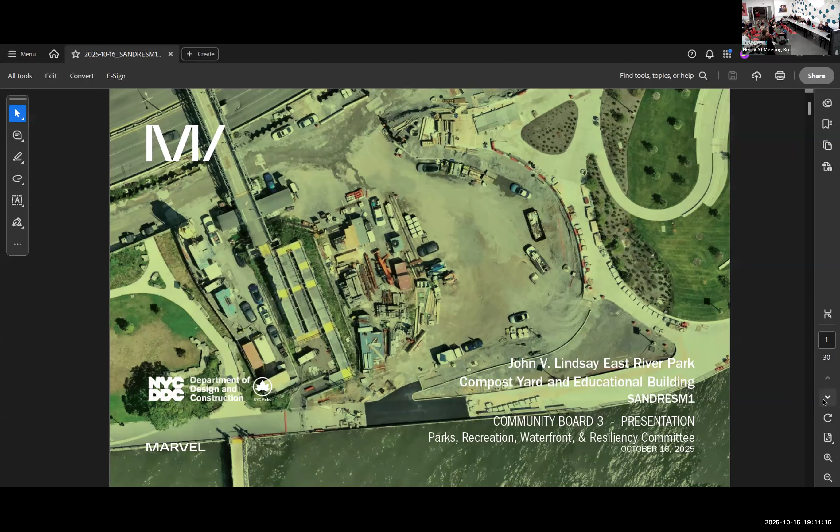The compost, the Lower East Side Ecology Center and Compost Yard is really this last node between Pier 42 and the rest of East River. You can see here the site as it was a while ago, right near the ferry.

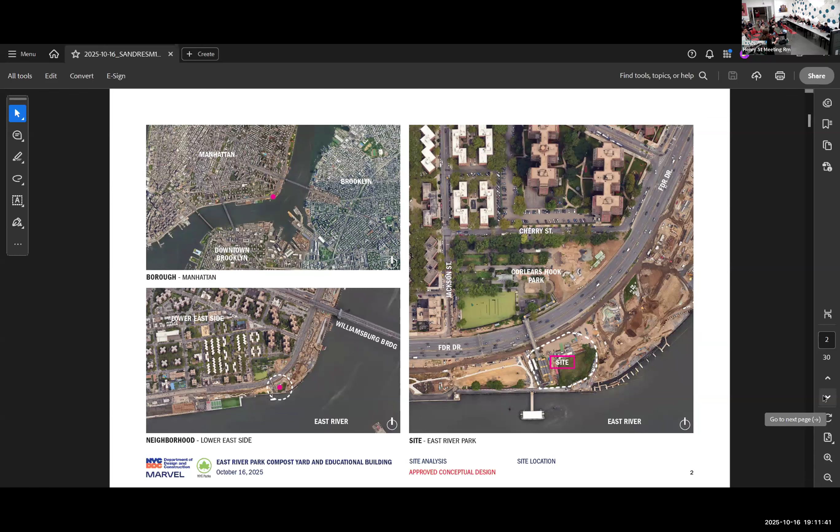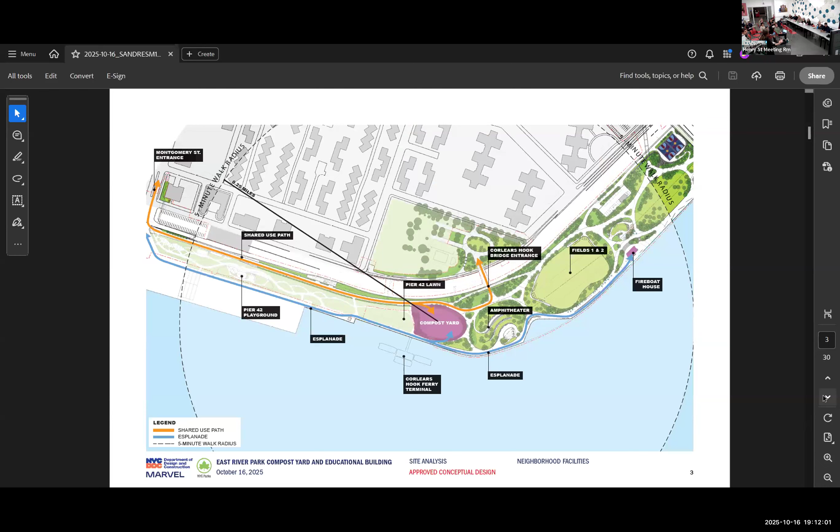Here you can see a lot of the programming that's already started to happen with the Esplanade close by, the shared use path and bridge that goes across the street, the amphitheater, and the fields. That circular dash is a 5-minute walk, so it's really within a 5-minute walk of everything around there.

This is a more recent photo of what's been going on, so you can see there's some green happening, and I know there's more planting coming in the future. Here's another bird's eye view looking towards the river, where you can see the lines of the amphitheater walls curving towards us, which we'll talk more about.

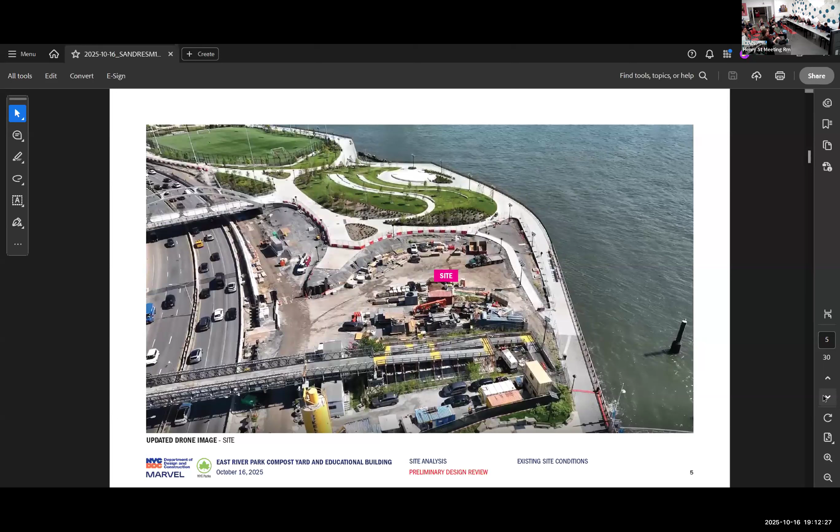As we started working on this, we visited a lot of compost yards. I know Christine knows all about this, but we've all probably done the part where we collect our compost and deliver it. Then it's decontaminated so all the bacteria is taken away, and there's a curing process where the compost is exposed to the air, with aeration happening underneath the slab. Then it goes to a different structure that has a roof, and it's brought to a trommel where it's screened, and then it's ready to be used in a garden condition.

So we thought about that. We also thought about all of these ideals that were very important to us: a strong connection between the community and the park, making sure everyone is welcome, and making sure there's an indoor-outdoor connection with the building, the yard, and the site. There's also a really important educational component with the Lower East Side Ecology Center's programming that we want to make sure is very clear. And we wanted this building and site to be very durable, long lasting, and stand the test of time.

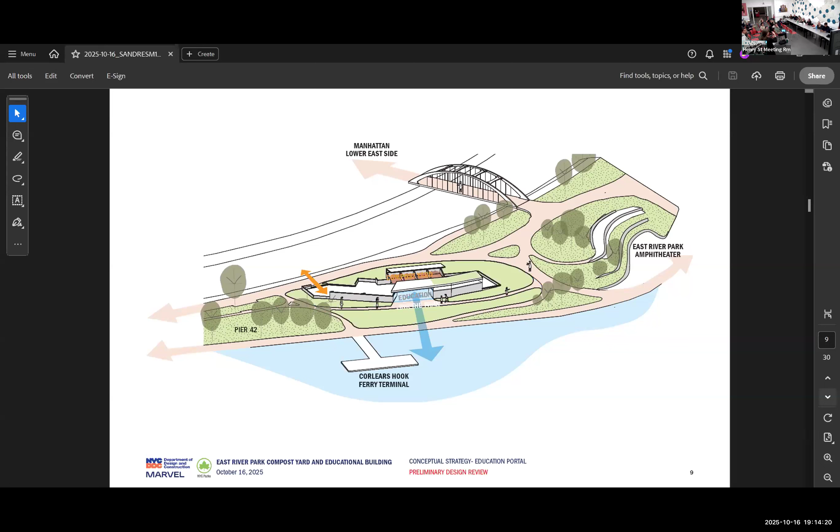Here you can see a diagram of our site. We have this yard, and then we have this educational node kind of in the middle that you're able to access through. We want to link both of the parks, Pier 42 and the amphitheater area, with a new path between them. This is a little drawing of what the structures will look like, where there are some walls and fences around it, and this building that allows you a portal to come in through and also see into what is going on with the compost.

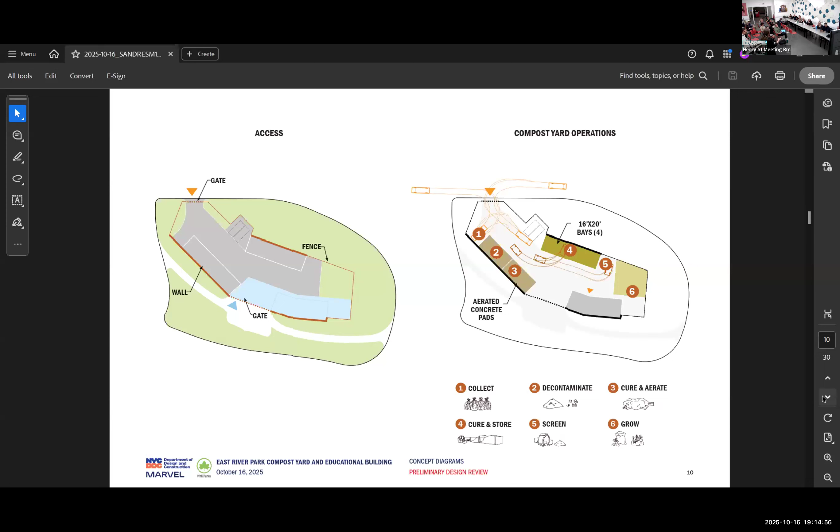Here you can see on the left the idea of access and programming that we have. Where the fences are, all of the gray is where the composting operations happen, and the blue is more where all of the education happens. On the right side, you'll see where we have all the different parts of the composting process, which end in a demonstration garden, which is kind of like the culmination—using the compost in the garden.

With the circulation and education, we wanted to create 2 outdoor classrooms that flank the building, shown in blue, and also have paths that LESEC can bring people on guided tours at appropriate times throughout the site. Then there's a new building where it says public staff, which is really where the offices for Lower East Side Ecology Center will be.

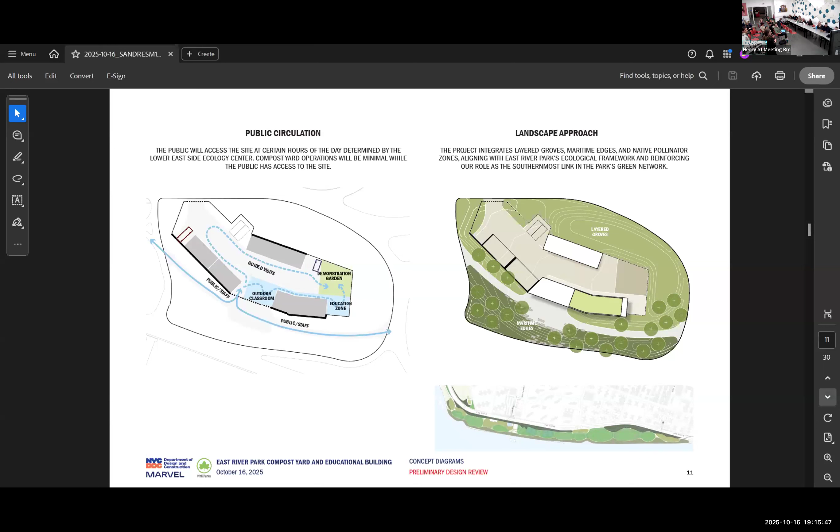The landscape approach is also about being an extension of both parks, creating the same layers of the edges, the groves, and the pollinator areas, so this is a continuation of all the work that's been done so far. The building is also meant to be of the park, so all the materials and thinking behind it really aim to make it feel sited and not foreign. We're considering using a lot of cast-in-place concrete, which you'll see with anti-graffiti coating, so it's easy to clean.

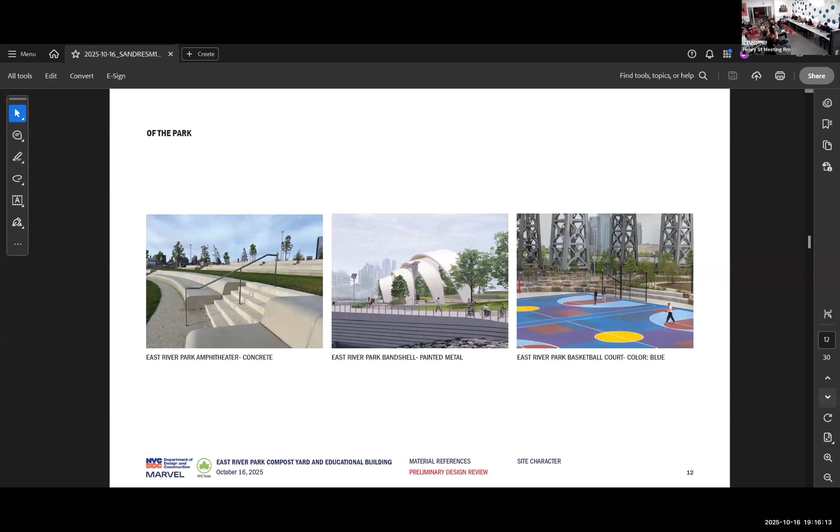There's also a new painted metal band shell on the amphitheater with this thin roof, which we're using on our roof as well. And then we also are thinking about color a little bit. It's part of the building. This drawing is very architect-y, but it's meant to show you how we're thinking of these layers of materials coming into the site.

So the walls wrap and come in and out of datum, and then the fencing sits on the walls. The site structures, the compost structures are all concrete, and they sit on these walls too. And the building is also concrete, and it sits on this wall. We're trying not to use a lot of materials so that it feels all very cohesive. All of the fencing is meant to be the same, with all these gates. And then there's also some grating along the upper windows.

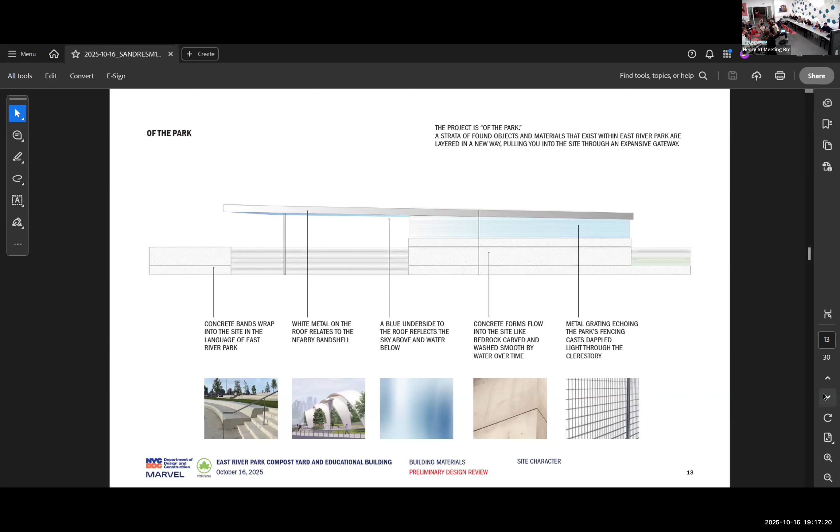In some of the later images, you'll see this kind of thin white metal roof that extends. Underneath it, it's blue, to kind of make you feel like you're at certain times of day—it's a nod to the sky. So maybe it'll be the same color as the sky sometimes.

So I'll pass it off to you, Dale, to talk more about the landscape.

Yeah, so this is a good point of extension of the building and the materiality of this project, right? It's taking cues from the existing parks, both in the building and in the landscape. If you can go to the next page, we can show you a little better that sort of integration and how people can access all the way around. You see, Debbie mentioned the idea of connecting the Pier 42 park side and the circulation there with the Lower East Side Ecology Center, and then the rest of the East Side Coastal Resiliency Park. So we have this circulation that happens in the middle.

Taking advantage of that outdoor classroom, which you see here in white, that is a roofed open space, right? That's also the entrance—the entrance for staff and the entrance for public. And then right outside of that, you have this sort of gathering space in front of it, which again takes cues from the materials and articulation that the rest of the park has, with a series of boulder edges and picnic tables and umbrellas to provide shade and space for people to gather there.

On top of the office space, you also see there's a green roof in that area, and we're also providing a lot of trees that are an extension of the typology of trees happening in the rest of the park, and we want to make sure we provide for shade in the future. So we're doing both the umbrellas and the canopy trees, so that in time you'll also develop a good canopy and shade area there.

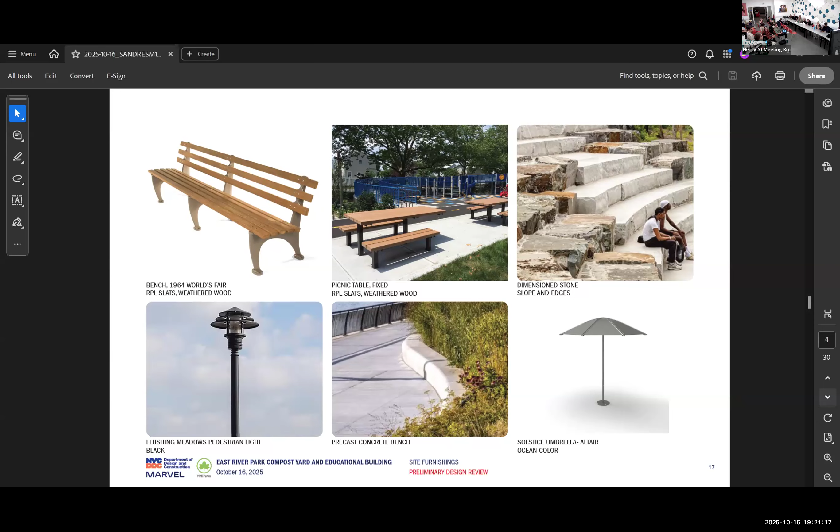A lot of this vegetation includes plants that you see in other parts of the park already. There's a lower point with vegetation more related to areas that may be a bit more wet, and there's also an upland meadow palette.

We're creating these berms around the outside of the building, very in line with how the topography is being manipulated in the rest of the park, but also to help screen some of the activity happening inside the yard from the park activity. So you get glimpses of it in some areas, but you're also screening the activity with these berms.

And then some more evergreen, denser plants immediately around the fences, which will also help screen the fences and reduce the visibility of seeing the fence.

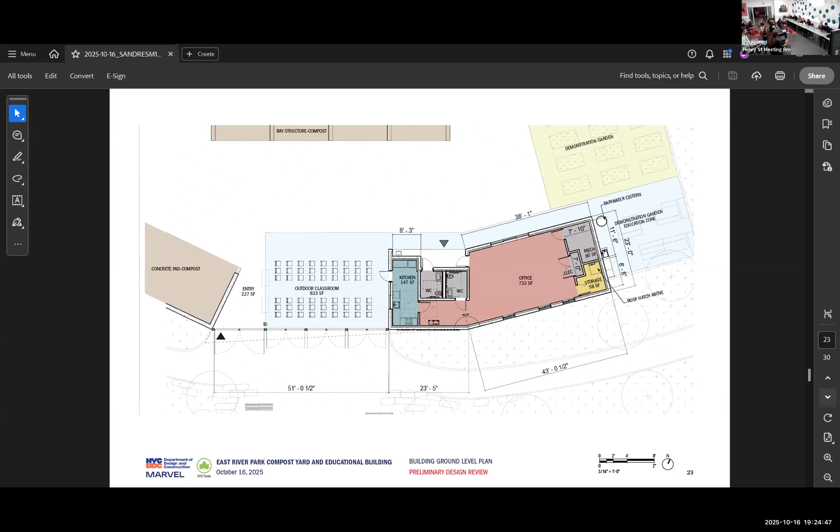But it gives an idea of where you'll see the composting structure—these are the bays where they're carrying material. This one is the one that has to have a roof, that's the compost bed. And then there are spots for different things, like the white and green areas.

Okay, hang on, let her finish and then we'll ask the questions. And this is the building we were talking about too. What? No, just—no, go ahead. I'll just ask you to start once you get in, when we finish.

And this is a view from the Esplanade, so you can see the same roof structure with the green roof, and there are some windows in there.

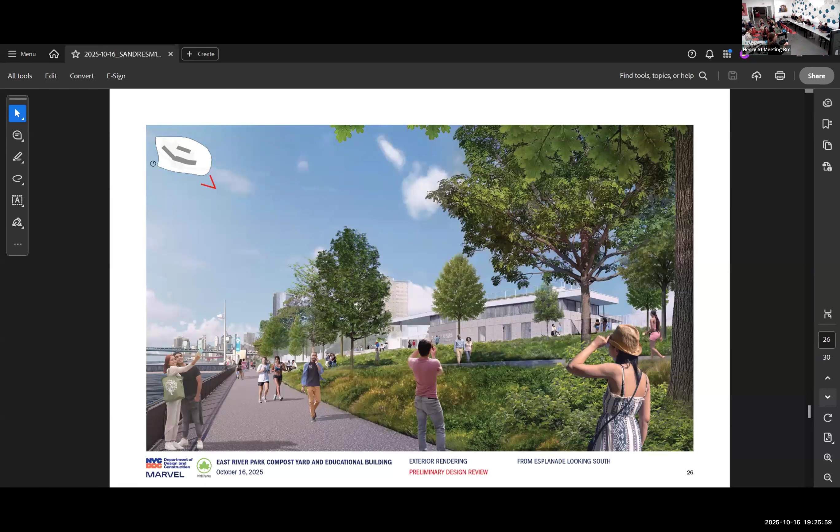Next slide—here you can see the idea of the fencing materials being the same, with the roof gratings and the white of the roof that we're talking about with the amphitheater.

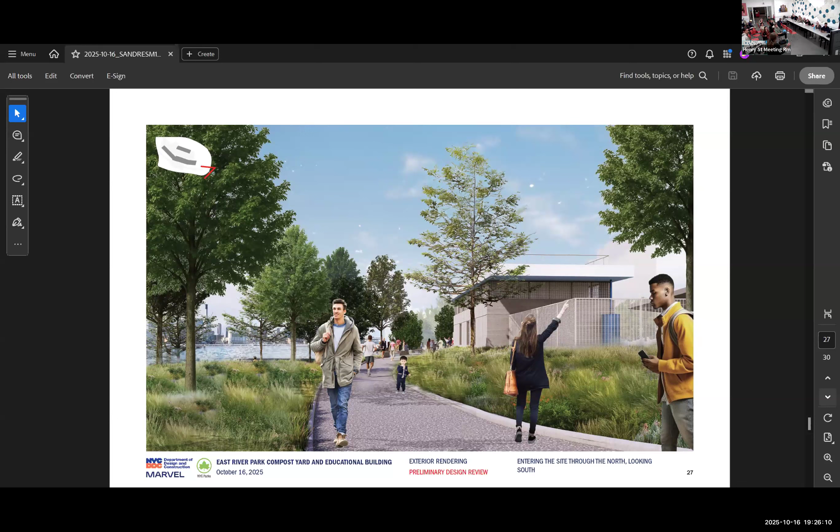This is that same view Dale was talking about, where we're in the gathering space in the front, looking into the yard and into where you see the compost bays. And this is the view from inside, like if there's a volunteer day, there would be people around and you can have a classroom program in there.

And this is a view being in the classroom, looking out towards the river. With all the gates open, it can really feel like you are inside and outside, and that shade is important too. This provides shade in a very permanent way and allows this connection we hope with the community. That's it.

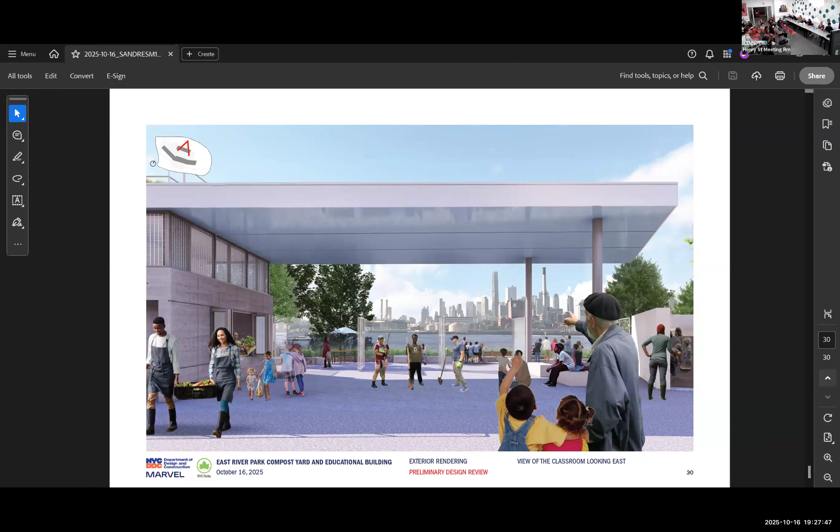I think it's beautiful and I would like to work there, but I have a couple questions. Big question: where is the wall in relation to all this? Because looking at the water views you showed, there is elevation at this site. And what's the timeline for when you put that elevation in, which is not currently there because this part was left out of the original build out? Do you have to put in all that fill and then wait to build the building?

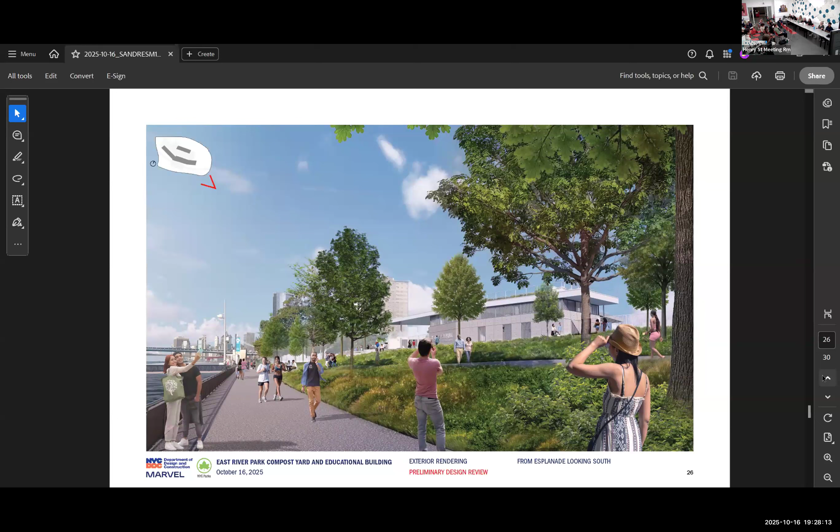I'm just going to go through all my questions. Will the city council money that's been allocated cover this, or is it also part of the overall plan? Then smaller questions: I didn't get a sense of the size of the space, like for bringing trucks into the middle part, and the fence for the outdoor classroom and the entryway from the water side where people would be entering. I'm skeptical of the security of that. I think it looks really nice, but when nobody is around and it's closed, I'm a little skeptical.

Hi, sorry, I'm Melissa Haldeman with NYC Parks. I'll just join so we're all on the same spot. I think I can answer your question about the wall. So it's right around where the compost yard is, where the wall becomes buried. It's above grade and running along the shared use path all along Pier 42, and then it goes below grade right there. So the site actually starts at elevation 8 and goes up to elevation 18, about 18.5, but the building is 16.5, and the pathway is around 18.

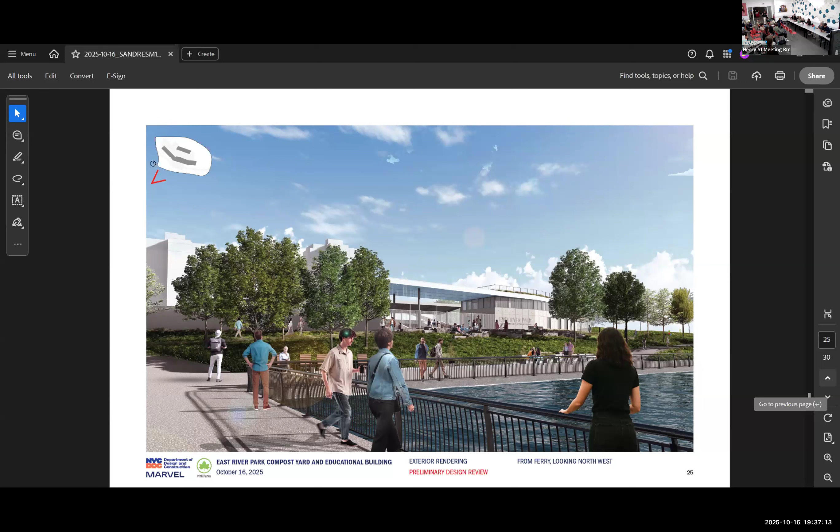I also want to say that the operational side is oftentimes just termed as composting, but we do more in East River Park than composting. We also do a lot of maintenance there. We were the stewards of the park before it disappeared, and we are the stewards of the park still. So there's a lot of weeding that we're currently doing, and we're getting data on how many weeds there are to understand what's coming at us in terms of composting all of that.

Stewardship also requires that you have wood chips at hand. So one of these covered bays, for example, will just be to store wood chips. So when we do weeding, we have wood chips at hand that we can bring out and cover the ground that we've now cleared of weeds.

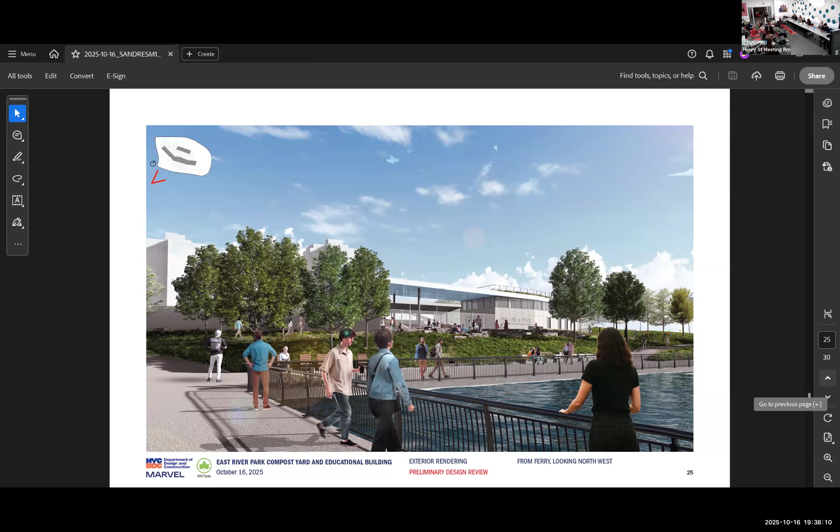So you should see this site more as— we need to come up with a new name, and hopefully everybody will help us, because it's the compost yard, but I think it's compost yard 2.0, and we need to find another name for it.

Thank you. Okay, Val, can you go to a picture where you show, like, the amphitheater? Okay, so where exactly is the ecology center? So all of this is the whole site. Oh, okay, so that's the site that right now has all those trucks and whatnot in there, all the random trucks. Oh, okay, so this is not done yet.

No, we're here because we are engaged with PDC, and it's important for all of you to give comments. So we're getting ready to submit this to the PDC for preliminary review, and then there's a final presentation later. Okay, so you're getting ready to submit this? This hasn't been submitted yet? We were approved for conceptual design with PDC, and then we're planning to submit this for the next round. So right below this is Pier 42 Park?

Yeah, this is correct. Everybody likes the design so far, going across to where the amphitheater is—people like that. The section over there, Pier 42, people all talk about liking that, so I was just like, where are we talking about? It's like that pile of dirt with trucks. No, I get it, I'm looking at the picture.

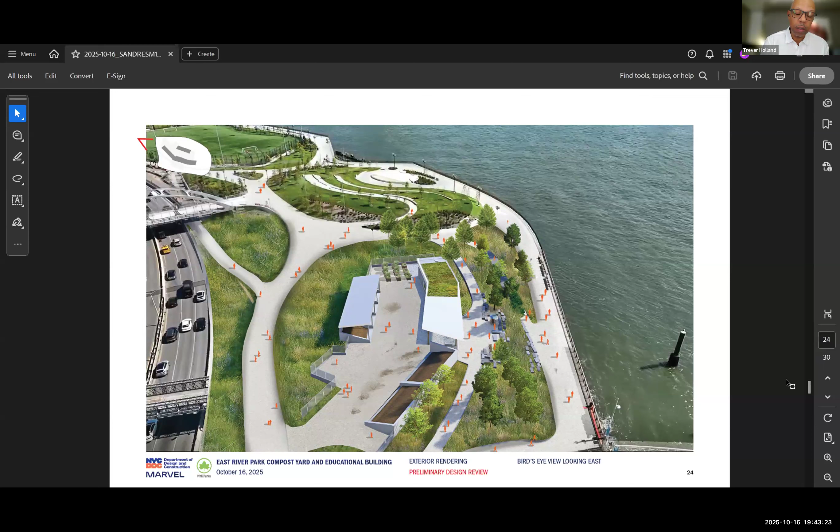I think that's something we have to go back and look at with Parks and DDC. I don't know if you heard me, but I think there's an opportunity, considering the roof space and size, to add solar to take care of the power for that building, especially considering this is the ecology center, and solar power has become a lot more efficient.

So I can take that back to Parks. My initial response is that the designers had to pull back the size of the green roofs a little bit, because the roof that extends over the outdoor classroom gets thinner and won't support as much. So I'm not going to put you guys on the spot to answer that now, and also solar panels were not part of the scope of the project. But Parks will certainly take that back and look at it.

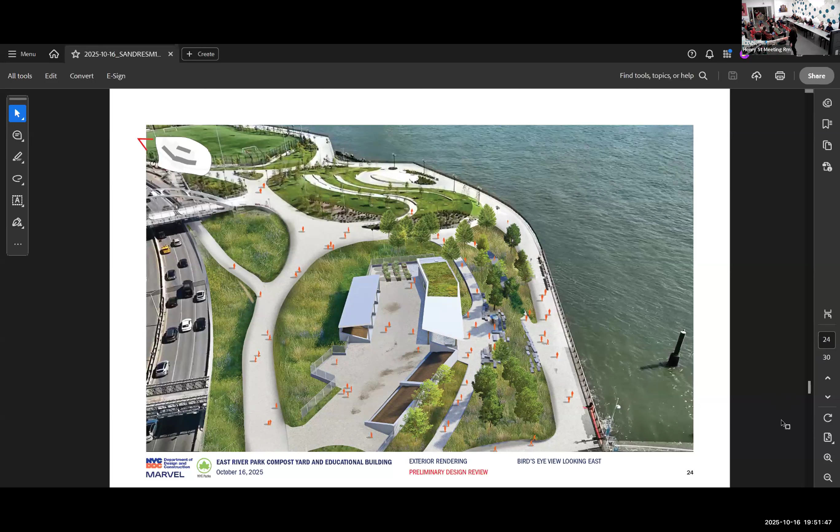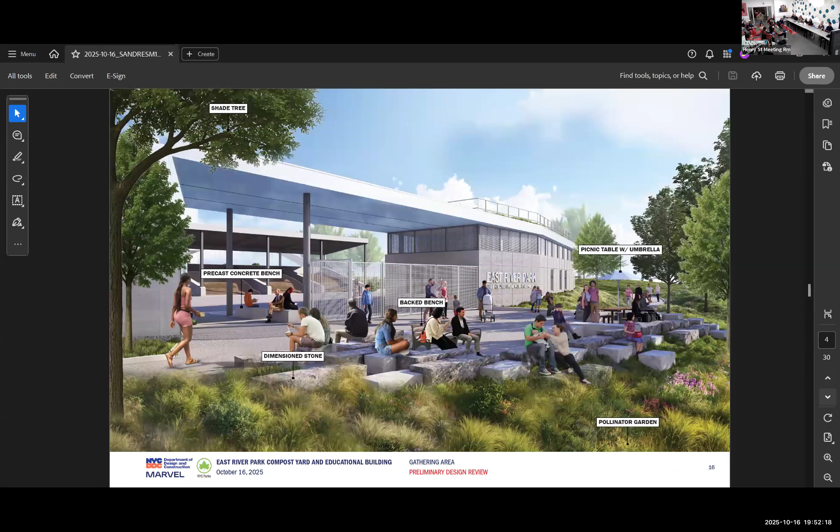My comment was the same as everybody's, it's just so hot and so exposed, there's no sort of passive solar. Are there going to be trees behind the building, or on that side? Why aren't there trees making shade for a passive solar situation? Maybe there's a way the trucks could turn around in a circle instead of backing out, with trees in the middle and circulation around it. I think there are better ways to do the layout so it doesn't have to be endless concrete - permeable pavers, gravel, something passive solar. You could have vines on the building, it could be so much greener. It's very exposed and hot.

We're maximizing the amount of area where we can actually put trees within this, and that's something we've been increasing. The areas you see without trees - we also have to be mindful there are some zones where the wall is, the front wall, or where utilities are that we cannot plant. So we're keeping track of that, but we're maximizing, we're going to maximize it.

Behind the building, can you build the soil up? It will be planted, for sure. So there's an area here where we cannot plant trees, but you can plant other things, right? Well, can you berm up against the building and have much deeper soil and then have some trees? There are ways to get it in there, even large planters with no bottoms.

I've been trying to think about how to recycle boats - I'm working on a marina, recycling fiberglass hulls. There happen to be a lot of boat hulls that would make great giant planters for trees, and I'd love to talk to you about that. I think there has to be a little more creativity, instead of looking at the restrictions, looking at more opportunities for greening the buildings.

Maybe there's a way to get the trucks to turn around with a loop, instead of little umbrellas in the middle of hot concrete reflecting back in your face. It's going to be great.

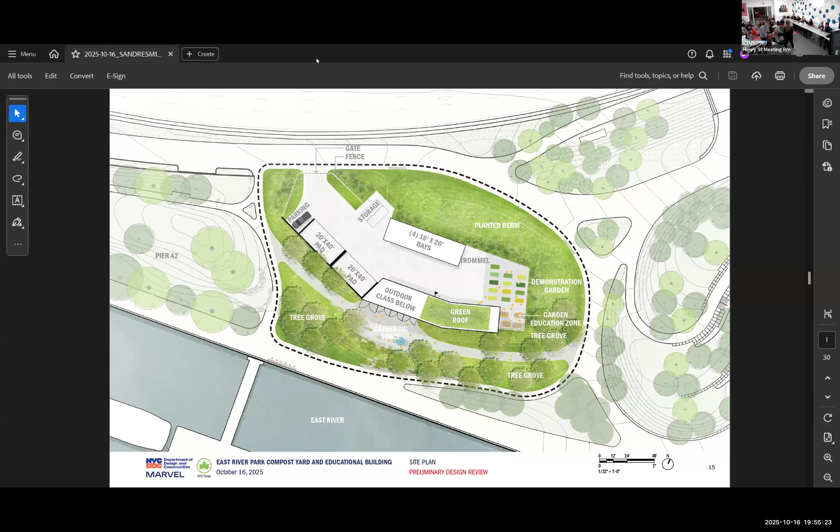I would just ask quickly, when do you expect to be coming back to this committee? Do you have a good sense of that yet? Might be wrong. I think there's - I'll defer to Melissa. Yeah, we'll figure that out. All right, so our next - thank you.

Our next agenda item is - actually, can I ask you a question? Would the committee normally give a resolution now, or would it be done with the full board meeting that month? What, if there was to be a resolution? We were told there wasn't a resolution, but we need a little bit of clarification. Would it be more appropriate to do it now or with the full CB3 later? Never, always at committee. Okay. Resolution for what?

Does that normally come before we go to PDC? For the final design, yes, but what you asked me for earlier was just a letter of acknowledgement that you presented. The board doesn't have to vote on a letter of acknowledgement you present. I think it was DDC that put it through, so we won't generally have to vote on that. What you have is, like I said, email me a letter, and we'll sign that you came and presented.

Okay, so Ethan, you have the next presentation. I do, yes. All right, so next presentation is on the East River Greenway project to replace or bypass the pinch point at Con Ed. This is another thing we've been waiting very eagerly to hear, so thank you. Go ahead and share it with us.

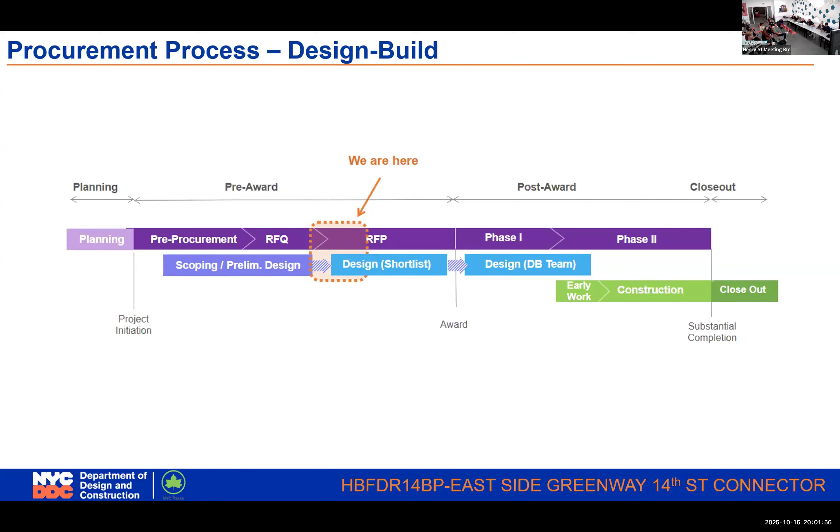So moving to the next page, just to give a snapshot of where we are. We're no longer proceeding with the flyover bridge. We're moving forward with what we're calling the East Side Greenway 14th Street Connector. It will be an in-water structure that ties in on the north side at Captain Patrick J. Brown Walk, down to the south side at East River Park, the northern part of East River Park.

We released the RFQ for this brand new in-water structure project in March 2025, out to industry. The evaluators selected 3 shortlisted proposers, with whom we're currently in a confidential period. We announced them in July and released our RFP to those 3 shortlisted proposers in September. We're moving forward with the process, anticipating a notice to proceed with our selected design builder in quarter 3 of 2026, allowing us to make that selection and go through the whole registration process of their contract.

With that consolidated schedule, by selecting the design build firm, we're anticipating the start of construction in quarter 1 of 2028, and construction completion in quarter 3 of 2030. The project budget currently allocated is approximately $160 million.

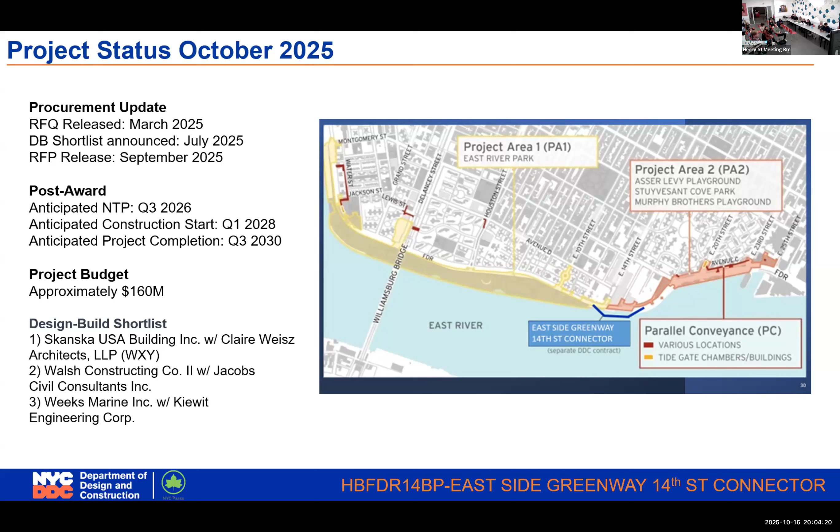Next slide, please. So I mentioned it's an in-water structure. I want to reiterate that the flyover bridge concept would not work due to the Con Edison pier on 14th Street, which creates a very narrow profile, that 4-foot wide pinch point we're trying to alleviate. So what we're planning to do is provide an in-water structure that goes around the Con Edison pier, allowing for a much wider pathway for both pedestrians and bicycles, which we're excited about, since we want to open it to the community and prevent everyone from hitting each other in that pinch point.

I forgot to mention this is a DDC project working in collaboration with Parks, actually Melissa. I bring that up because with design build, it requires a very collaborative environment, and one of the reasons this project was selected for design build. We're working with Parks to develop all these requirements and ensure the project is great for the community, working with DOT to meet their requirements, meeting with the Coast Guard and Army Corps of Engineers since this is out in the water, along with DEC, the Department of Environmental Conservation, and working with DEP on all of our stormwater items.

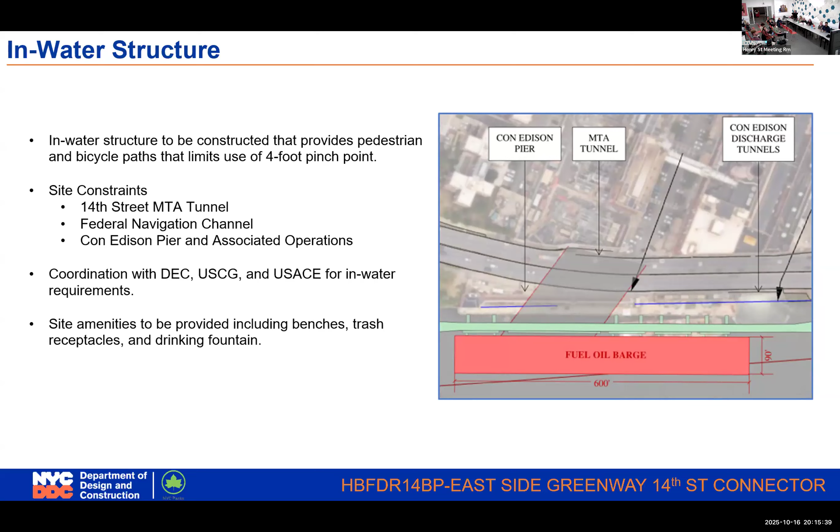Okay, the previous slide, so I can do a quick thing. Sure, do you want the southern part or the northern part? Well, that thing with the green bar in the water. The previous slide, yeah, this one? Say, Ethan, could you send this spec and the previous one to the office? Yeah, it'll also be posted online on the DDC website.

So I have a question before we take any questions from the public. This design build process -- we just had a presentation about something being designed through the traditional process, and we'll go to the PDC and all of that. What happens to the design of this? Is there a point where it's fixed? Does it go to the PDC? Is it reviewed, and all of that?

Absolutely, the process doesn't change. We still have to go through all the different regulatory approvals, including Public Design Commission. All of that would work. The conceptual PDC presentation and the preliminary PDC presentation, including the community board, would happen in phase one before we even do any construction. We want to make sure we're doing it right, before we start something and then have to remediate. So to answer your question, yes, the process stays the same. We'll still have the opportunity for the community to look at the design and comment.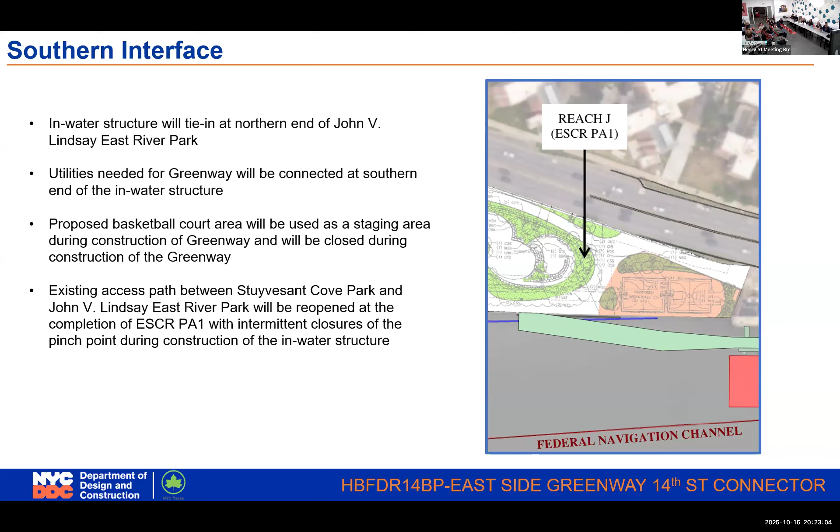No, I'm talking about if it's possible to make it bigger than where it connects to Captain Patrick J. Brown Walk. Well, I understand what you're saying, but can you make it wider, expand it? Our in-water structure is going to be 32 feet wide in this specific area, and on the northern side in between it's gonna be 25 feet. But again, where we terminate at Captain Patrick J. Brown Walk is where we're targeting that 10-foot width.

Mainly because that's an existing condition and we can't expand on that, we don't have the funding for it. So it'll be 10 feet wide, split like 5 feet for pedestrians, 5 feet for cyclists. For Captain Patrick J. Brown Walk, since we're not doing any work on that, we're not separating the pedestrians and cyclists.

We're focused more on the in-water structure where we'll have that separated. So if I'm understanding this correctly, Fanny, I think what he's saying is that the entrance that comes off Stuy Cove will only be 10 feet wide. But the greenway itself will be 25 to 30 feet, depending on what part of it you're in. So the entryway will be narrow because of that, but the greenway itself will be larger.

But exactly how wide is the surface, is it 25 feet? For our in-water structure, it would be 32 feet wide in this area where you have the green, and then right by the Thomas Pier it would be 25 feet wide, split between both cyclists and pedestrians. Okay, so I got confused, sorry. Yeah, sorry, the 10 feet wide is Captain Patrick J. Brown Walk. Okay, I see, I thought 10 feet was the actual roadway, but it's 25 feet, okay.

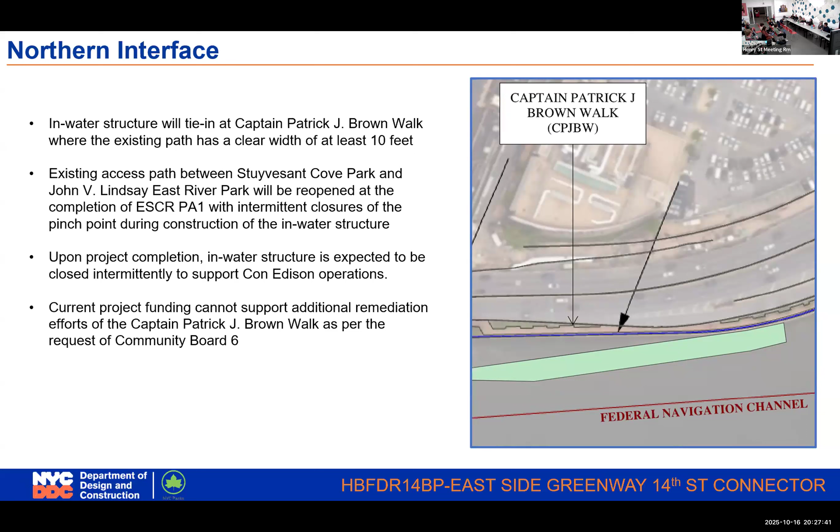Okay, thank you. I think you've gotten some good feedback about concerns about traffic conflicts and safety there, about shade and usability of the space, what the surface is going to be like. So if you can start to think through some of those things, and next time you come back we can talk about those more, that would be great. Thank you.

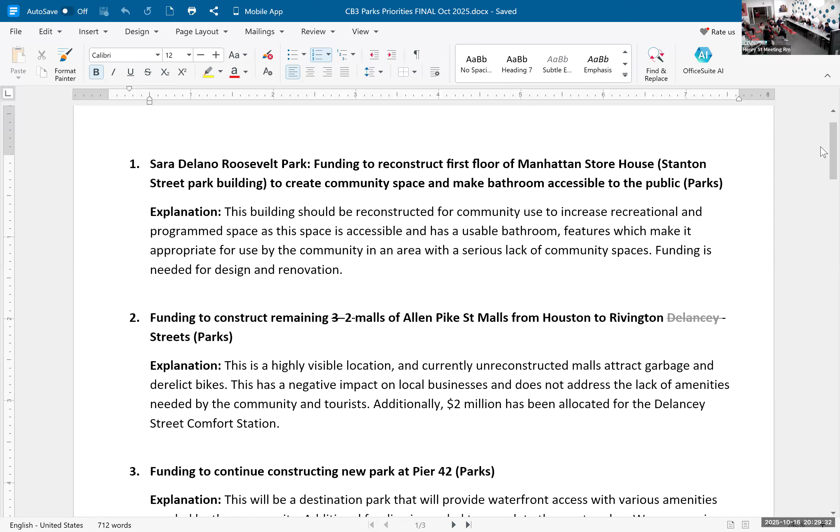What I did to prepare for you is I took all of last year's priorities that have not been funded. Trevor and I met previously with parks and went through a chart they prepared to let us know everything that's funded. So we took what's left from last year that's not funded, and included priorities the community board funded that weren't necessarily parks priorities, like the Stanton Street Park House.

So what we're looking at now is that list, edited to show what we still have, in the priorities you voted on last year. You can change the ranking if you want, but this is what you voted on in the past. I suggest we just go through each one, do you want to do that?

Okay, the first one has been a priority for this committee for a very long time: to reconstruct the first floor of the Manhattan Storehouse to be used by the community. Right now it's being used as storage for, I believe, all of Manhattan, and we want it to be a resource for Community Board 3. Parks is looking at this, but they haven't decided on exactly how it should be used, whether they go with our suggestion of a nonprofit running programs. But it's definitely on the list, so it's our highest priority.

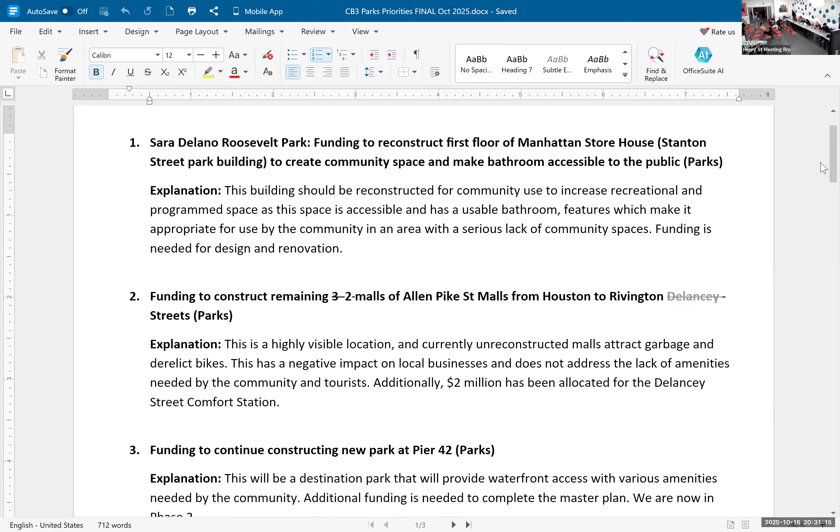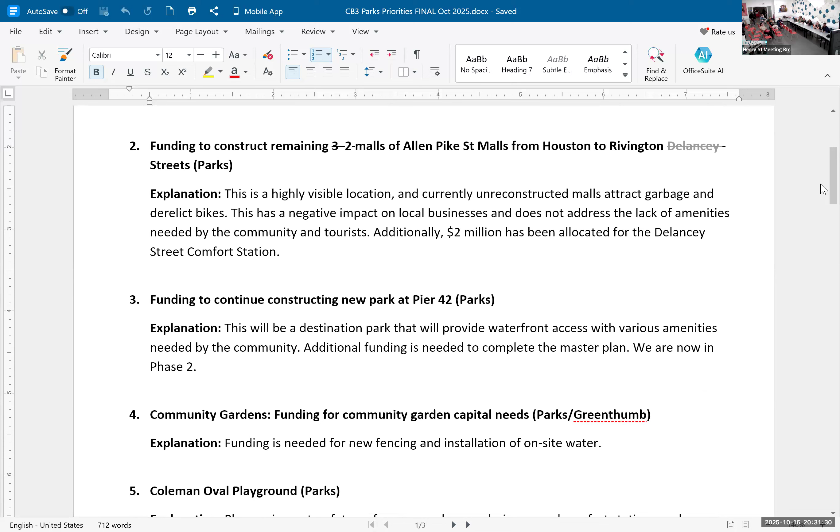Number 2 is the Allen Pike Street malls. They've been funded one and two at a time. We still have two that are completely unfunded. Some of the others still need construction done, but they're funded. So we have two malls that still need to be funded.

Pier 42, which we've had on for a very long time. We voted years ago to do that in phases, and we are now in phase 2. So it is used by the community, but we have further design and plans that we voted on that we want to keep on the agenda.

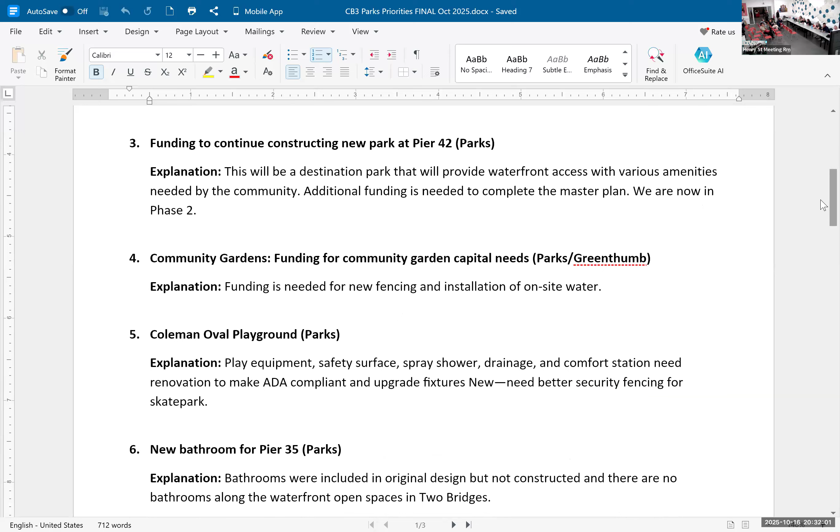The next one is community garden capital needs. So these are all capital needs, by the way. We did not get anything from the gardens, but this was on from last year.

Coleman Oval Playground - they still need play equipment. There's an explanation there of exactly how the money would be spent.

Next one is the bathroom for Pier 35. We've been told that technically it can't be done, because of the drainage and sewers and everything. But there's still something that needs to be done, even if it's porta potties or something, so we kept it on the list.

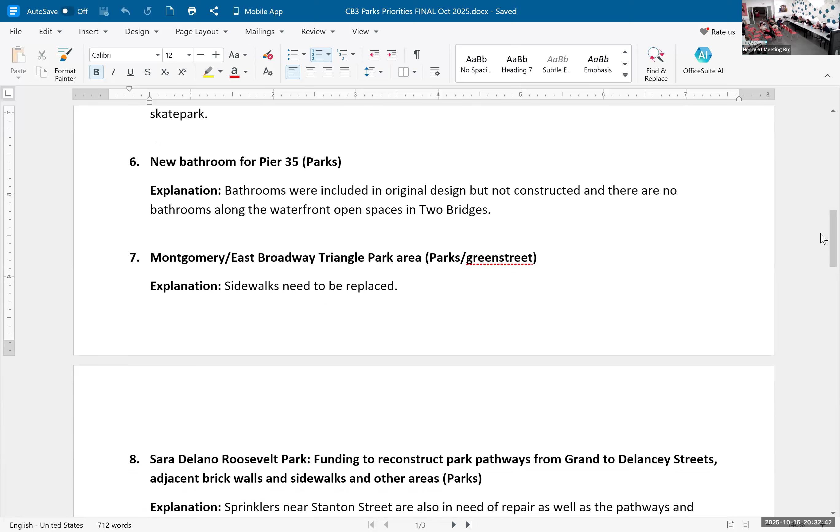The next one that's not funded is the Montgomery East Broadway Triangle Park area, and that one is sidewalks - Parks is responsible for sidewalks outside the park, so we're asking for the sidewalks to be replaced.

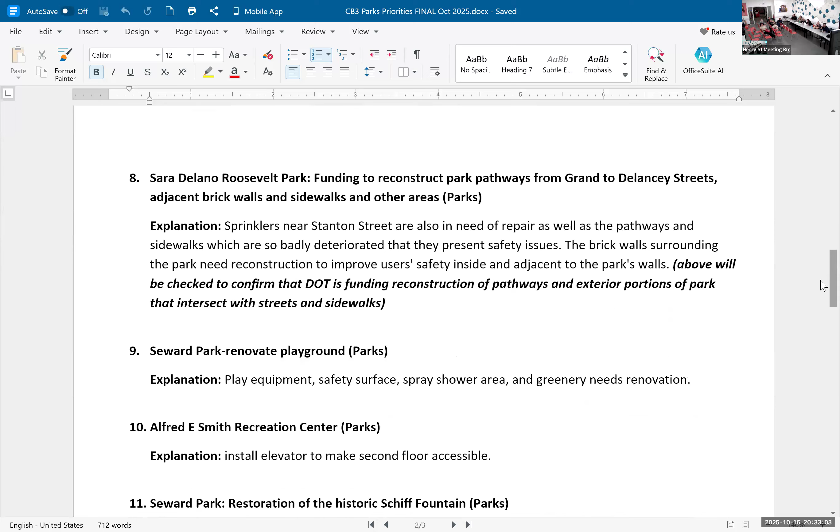Sara Delano Roosevelt Park - we still need funding for the reconstructed park pathways from Grand Street to Delancey Street, the brick walls, the sidewalks, and some other areas. You should jump in and put in any comments.

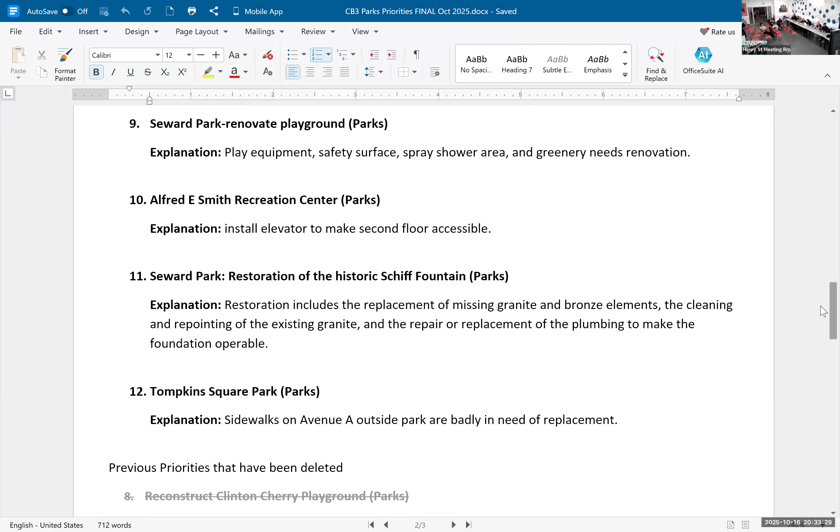Seward Park - the playgrounds need to be renovated, they're heavily used. Alfred E. Smith Recreation Center - there has been some reconstruction, but now they need an elevator to make the second floor accessible. Seward Park Historic Schiff Fountain needs reconstruction.

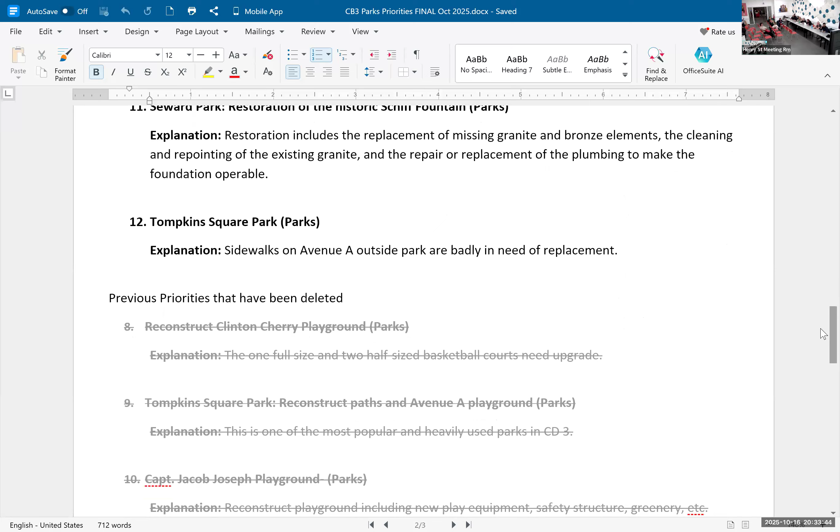The next one I'm actually going to ask Lynn because he was investigating this - on Tompkins Square Park, we had asked for the sidewalks outside the park to be replaced. Did you decide it could be patched instead, or what? I think some of them can be patched, and there's this wider issue, which is a lot of empty tree pits.

I think it should either have a tree or it should be paved over, saying that it's going to be for the flowers. Can I chime in? Of course.

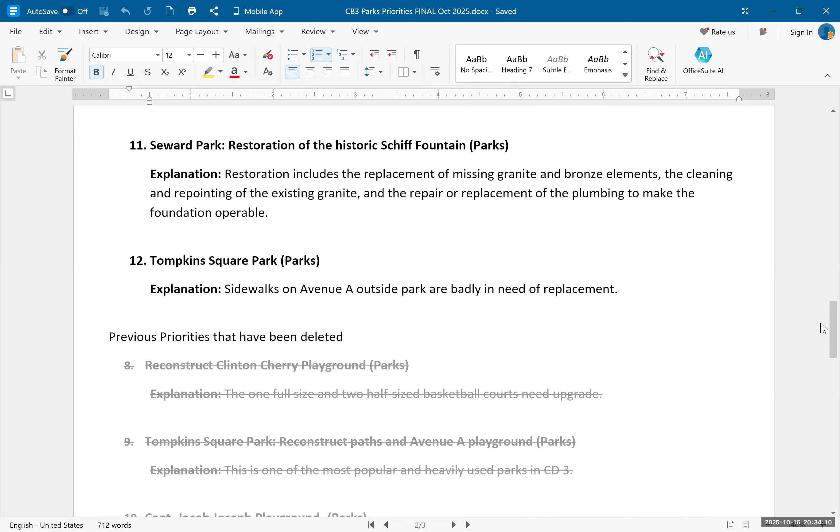So there's an issue with the DEP lines, they're sinking and a lot of the drainage is very poor. That's why the trees are dying. There's a need for better drainage on that whole side of the park and another sustainable water source on that side of the park.

We recently lost access to water when we had an issue in one of the playgrounds. We realized most of the water lines are connected to the building, which has brand new pumps, but all the water lines are a lot older. So the whole park went down and we only had the Avenue B side for a while. The dog run went down, the playground, and all of the water connections for Lower East Side Ecology's gardens near Avenue A. So what we're talking about is Avenue A.

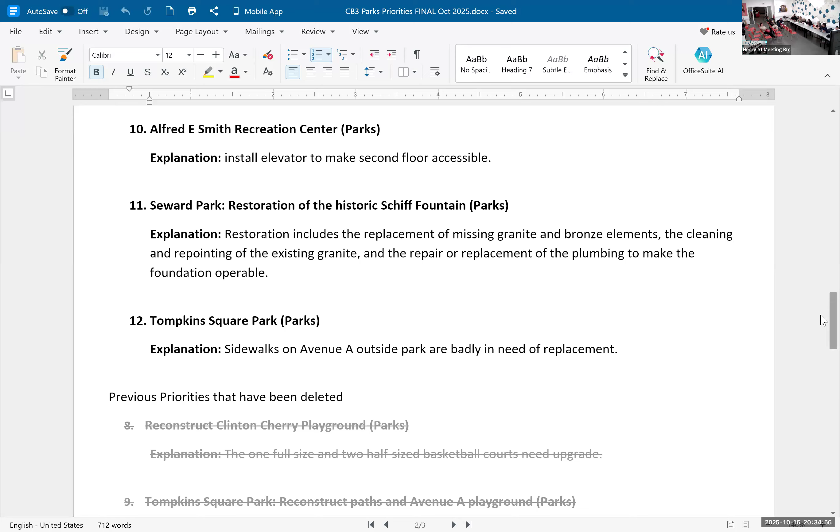And the empty tree pits, we do not want trees on. This board has done a resolution saying it's in the middle of the farmer's market. It's very unsafe, we've seen pictures. We want the empty tree pits between 7th and St. Mark's filled in. If you want to put bioswales, which has been discussed between St. Mark's and 10th, that is fine, but that's what we're talking about right now. We've done walkthroughs through there.

So what I'm asking is a funding issue. For the sidewalk, first of all, we're talking about the sidewalk. It sounds to me like we should keep it on the list and say it either has to be repaired or reconstructed. Does that sound right? I think it's about the sidewalk that's caving into the street because of those DEP lines underneath. So it's kind of infrastructure and sidewalk is what I'm trying to add to the list, because I think the infrastructure underneath failing is causing the sidewalk problem.

Maybe we'll change it to say... You hear? What, Therese, can you mute? Therese, can you mute yourself?

Okay, so it sounds like from what I'm hearing from everybody in parks that we should keep it on the list, but maybe not be so specific and just say it needs to be repaired, and they need to look at patching or reconstruction.

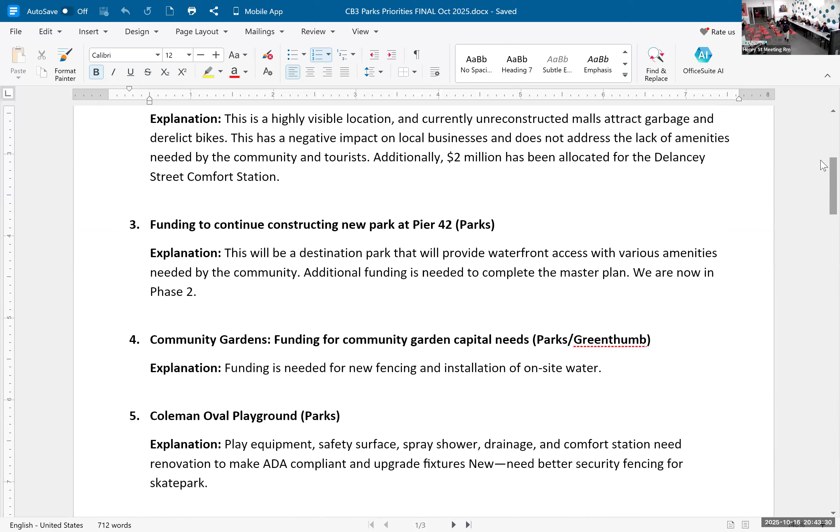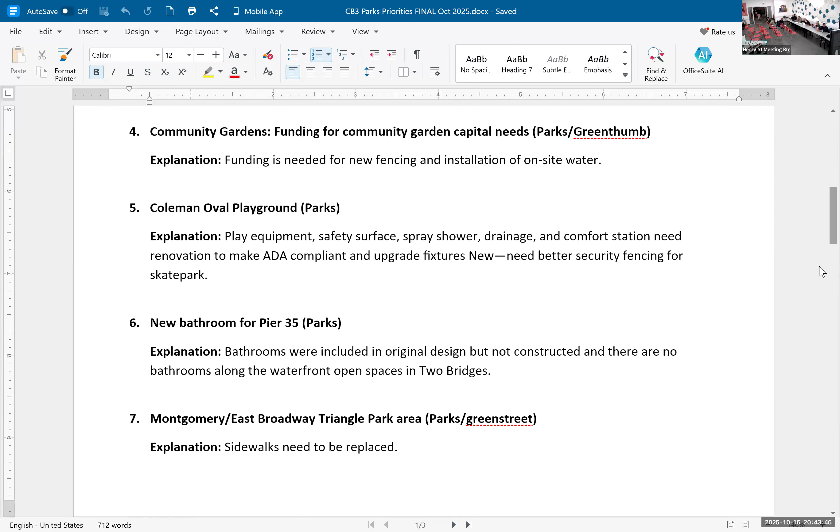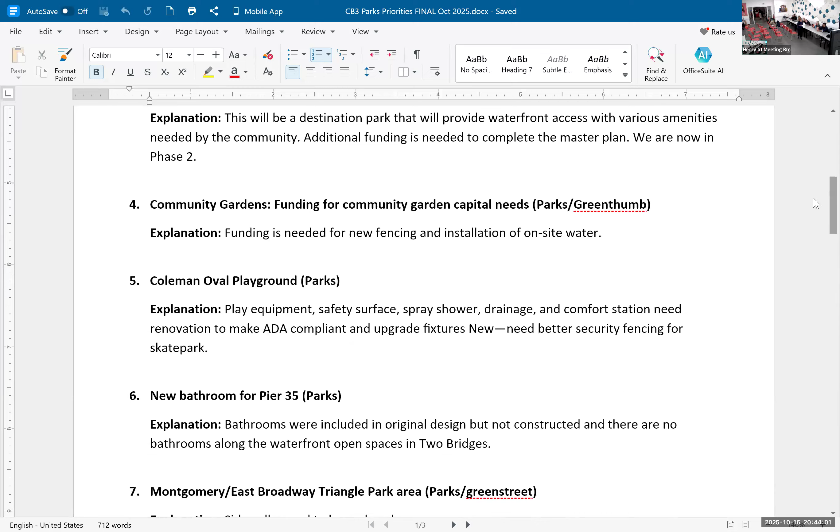It said Rivington to Delancey was removed—does that mean it's funded, is it part of the RFP for the bathrooms, or? So we went through, I'll show you the chart Parks made up for us of everything—capital on one side, expense on the other. These are things that are left that need to be done that are not funded. You could take a look and pass it on. I just didn't know, because that block is currently not—I didn't know it was part of anything.

Do we agree that Sara Roosevelt Park should be number one? Yes. This committee has fought for that Stanton Street Park House to even get it on the list. That's been a priority of this community, not personally anything on my agenda, but a community priority for ages. It took a lot of work from people in this community, community board, elected officials and others to get it on the parks list.

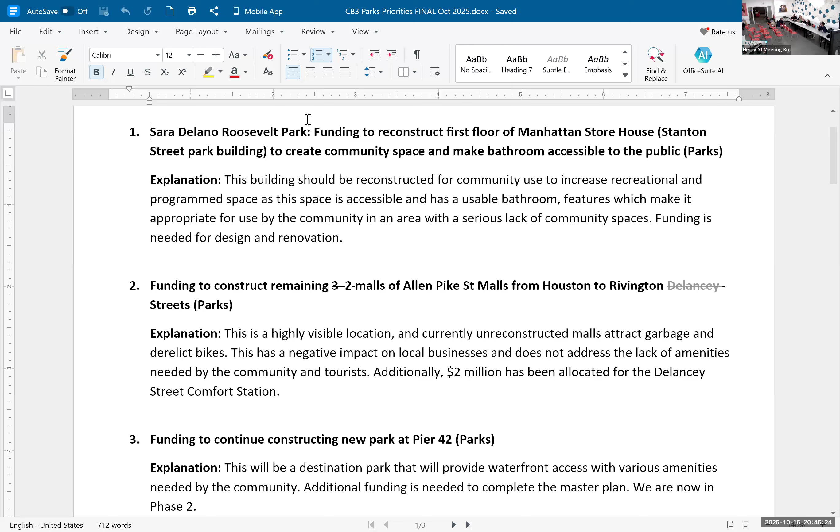Teresa is really passionate about the Tompkins Square Park request. Should that be moved further up? The sidewalks, to me it's a danger issue, it's a safety issue. It's not aesthetic or anything else, it's just a safety issue.

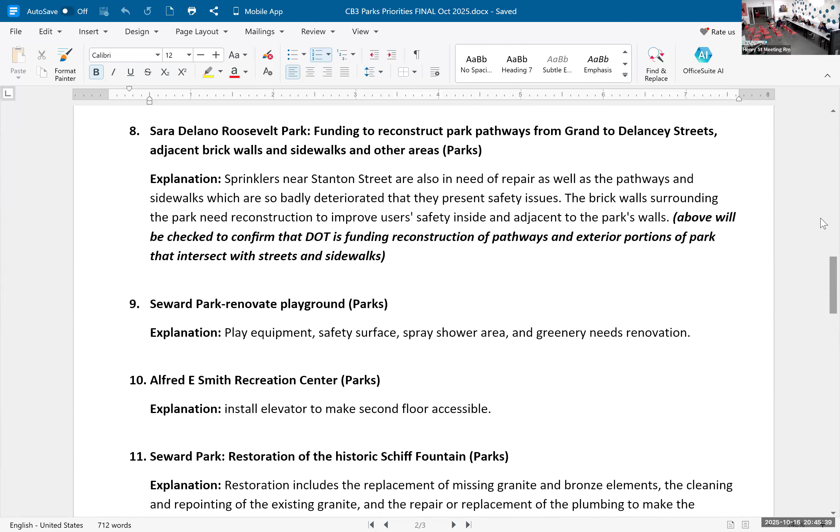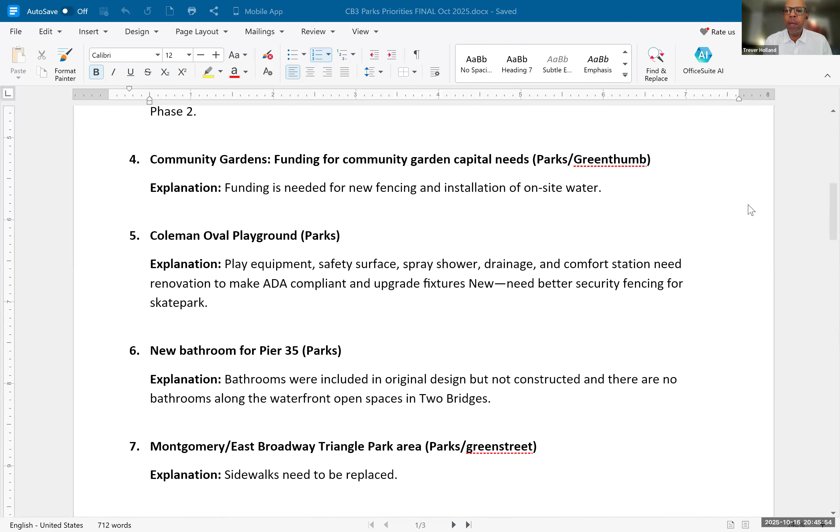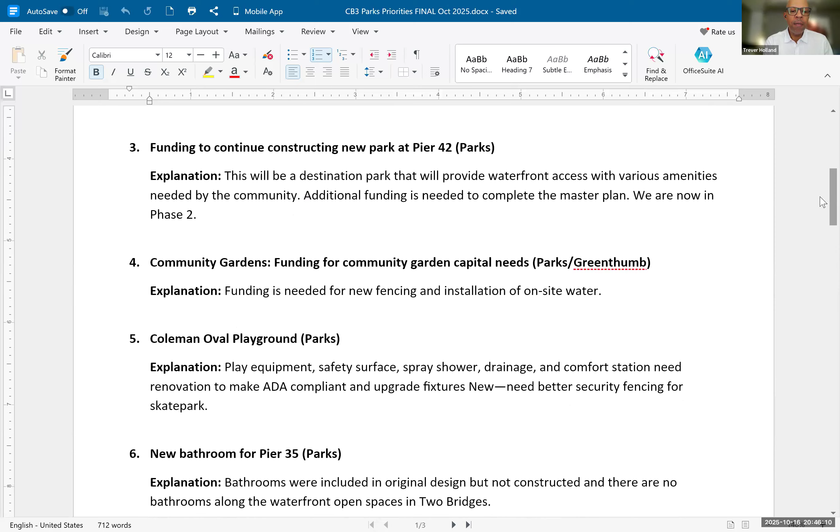So with that being at 12 and it being a dangerous issue, I can see moving that up into the 7, 8, 9 area. A lot of the stuff at 1 through 5, maybe 6, have been here so long and we need to keep advocating for them. But as mentioned, it's a safety issue, so that should probably move up at least 3 spots, if not more.

I could go with that. So move it to spot 7. Everyone's good with that? We're talking about moving one of the priorities up for the Tompkins Square sidewalks because it's dangerous, given the condition of the sidewalk. Are you opposed to moving it up? To 7, so we're going from 12 to 7 now. Okay.

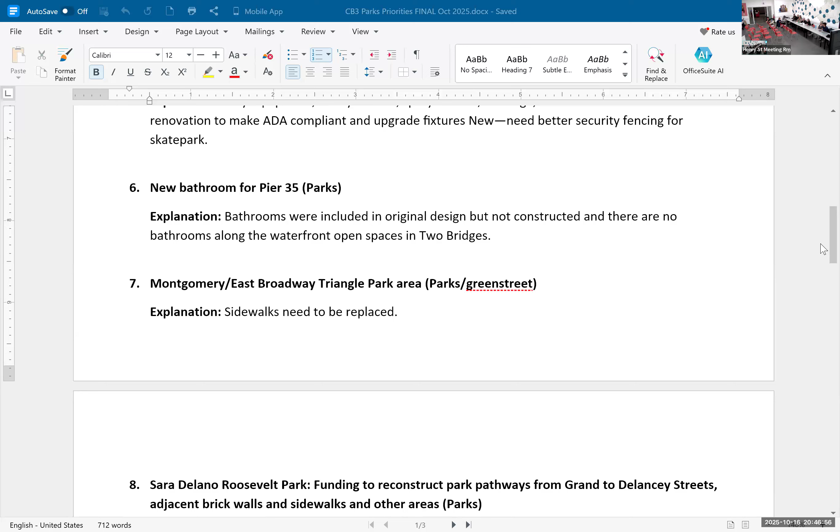The other thing is to add, as discussed, the Gardener issue, either at 2 or 3 in the expense category. I think it's important, and Teresa's outlined that, but I don't want to move PEP too far down, because as Susan mentioned, that's what we hear from everyone about the lack of PEP. So I think that just needs to be added to the list as a new item, added gardens.

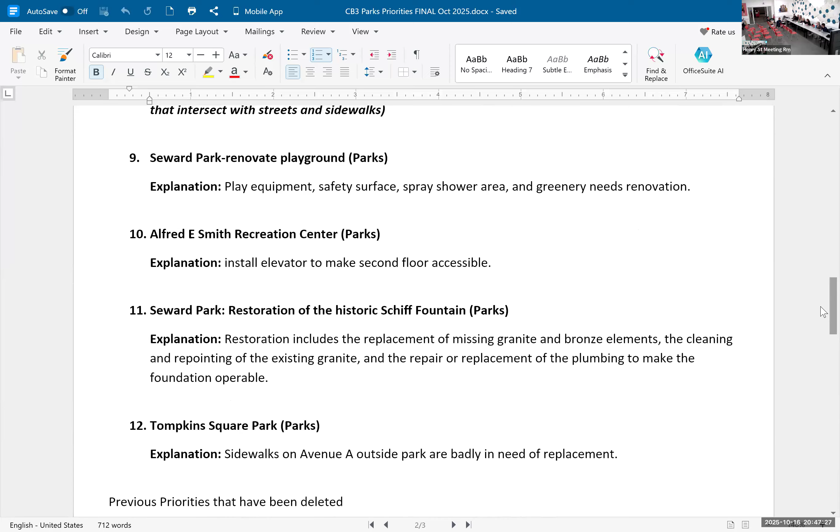We did that, but it's on the bottom, so where do you want to put it? Let's put it at 2. I wouldn't do that. Did I suggest playground? Yes, okay, we got associates from reporting. So then, 4? I don't want to lower the PEPs because that's the main thing we hear about. I think number 4 is good. So we're adding gardens to number 4 in the expense category. That's number 4.

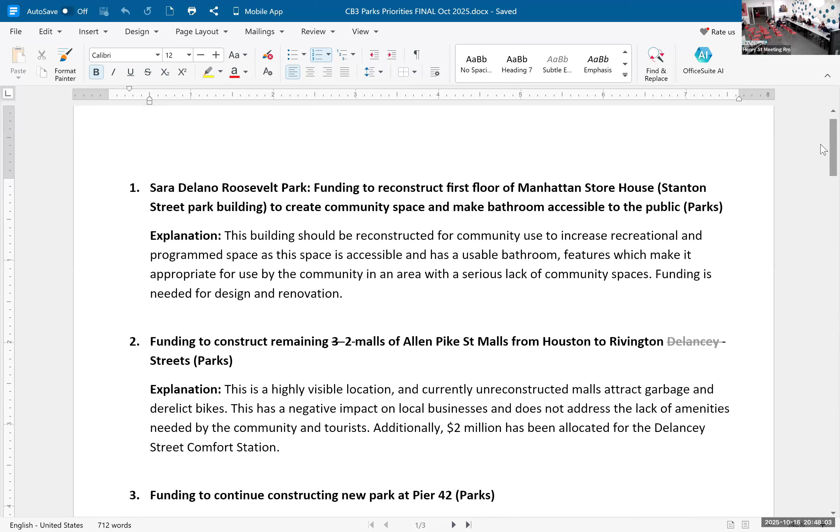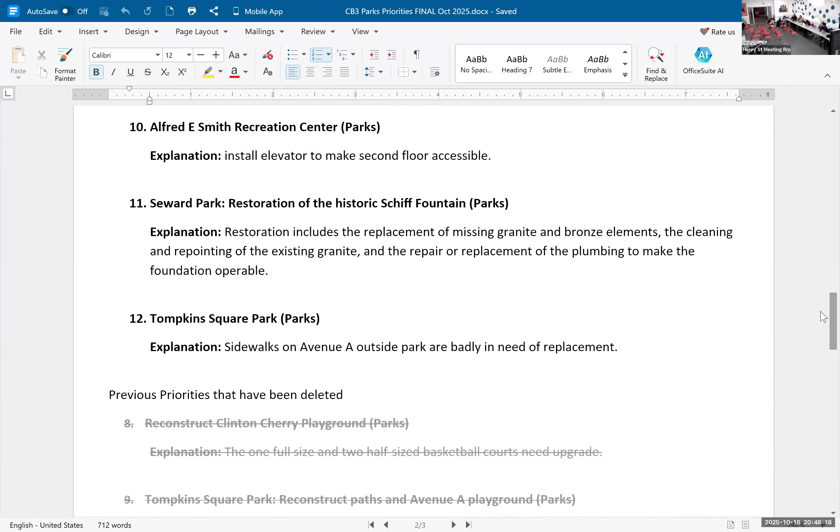Every park expense issue is really important. So can you vote? Are we ready? Anybody ready? Alright, we're good, let's vote. Want to see the chart? I know the actual board is on the listing, right? For something else, we're voting on what's on the screen.

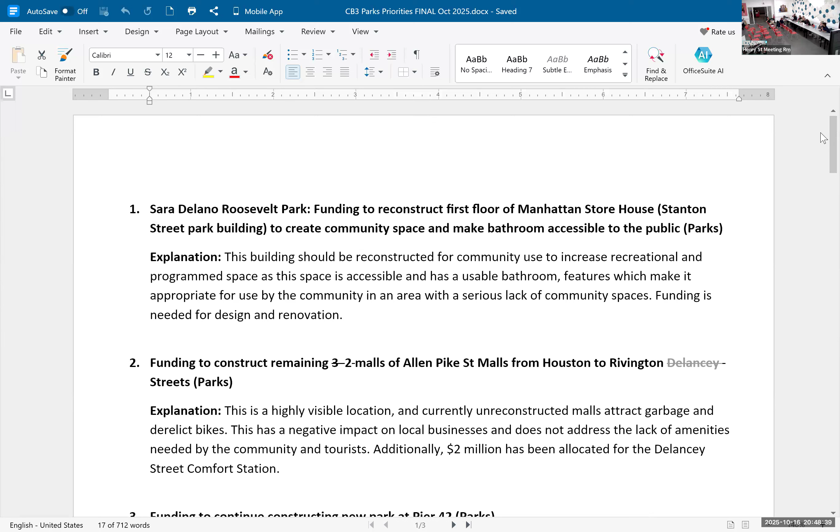Because we're right over it, I can't see that. Robert Holland here. We are voting, this is the vote for the minor changes we made to the priorities. It's a vote for the whole district needs and the priorities as you have now ranked them. Yes, and we made only 2 changes to those priorities, okay?

Okay, so also attendance, yes. Can we double this as attendance? Yes. Okay, that's all there, it's in the meeting.

Absent. Diane Lake, yes. Ryan Gillett, yes. David Adams, yes. Colin Shan, yes. Catherine Freed, absent. Valentina Jones, yeah. Nancy Kong, yes. Daisy Fayette, yes. Daniel James, yes.

Yes. Josephine Velez, I want to know what happened to the triangle park that was on the list. It's on there. That's when I think it's not. Okay, yeah, it's there, she said yeah. Okay, what's there? Absent. Roger Lanian, absent. Howard Ned, absent.